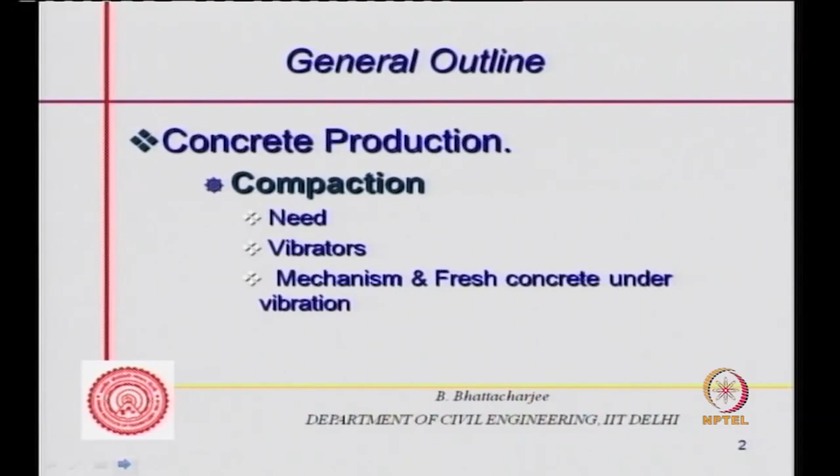So first we talk about compaction. Why do you need it at all? Then generally we use vibrators, so something about the vibrators themselves. Then the mechanism of fresh concrete under vibration, briefly, since we have discussed quite a bit of it elsewhere earlier. Then we'll talk about execution of vibration again briefly, and lastly we'll talk about curing, need and method.

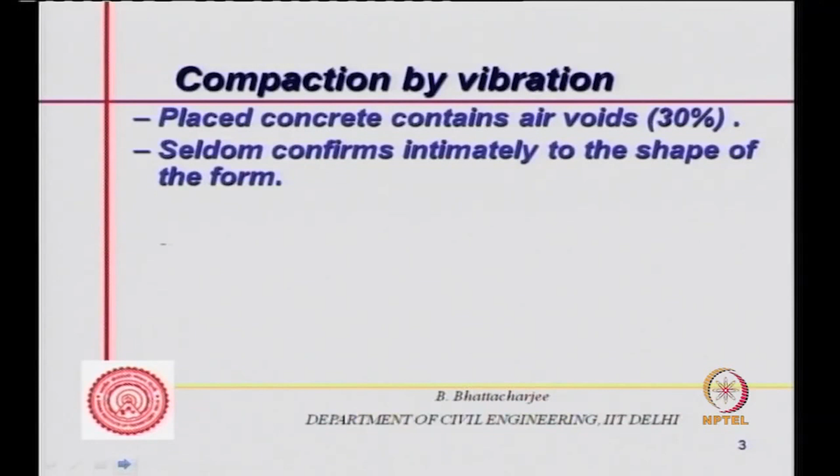Let's talk about compaction, which you usually achieve by vibration. I mentioned earlier that placed concrete contains air voids up to 30%, if it is dry concrete - we're not talking about very highly flowing or self-compacting concrete. Also, concrete seldom conforms to the shape of the form. Therefore compaction is required to drive the entrapped air out, to densify the concrete, and also to increase homogeneity and uniformity. This has other benefits, but largely the entrapped air has to be driven out and concrete must be densified. That's why we need vibration.

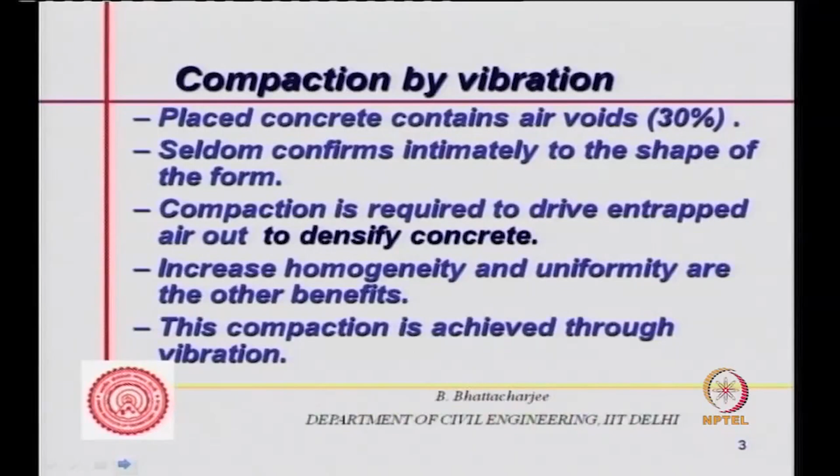This compaction is achieved of course by vibration, as we mentioned earlier too.

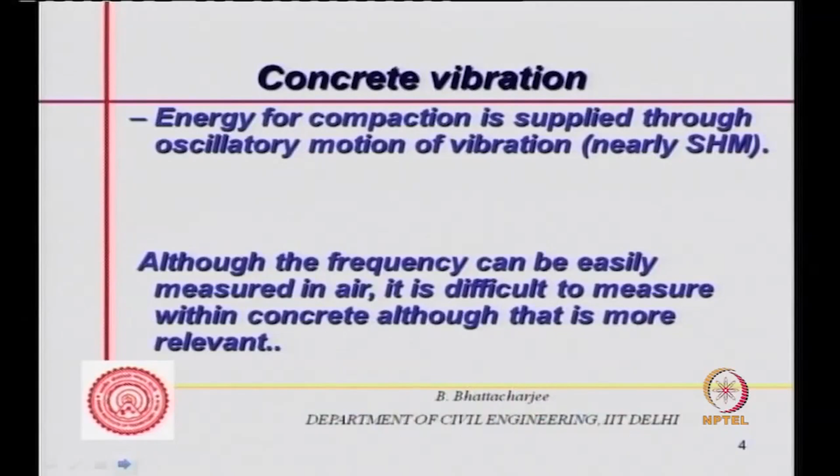Now, concerning concrete vibration - energy for compaction is supplied through oscillatory motion of vibration, which is nearly simple harmonic motion. We can measure the frequency of such vibration in air, but it's difficult to measure within concrete, though it's more relevant if we can measure the amplitude of this vibration. This energy is generated by means of a rotating eccentric having a frequency and amplitude of vibration. So essentially every type of vibrator is basically a moving eccentric with frequency and amplitude that generates the vibration, and this oscillatory motion, which is simple harmonic motion, causes air to drive out. We'll look into the mechanism of course.

We can determine the frequency of the vibrating machine or equipment in air, but within concrete it is difficult because of the effect of damping and other factors - the interaction of the vibrating component with the concrete makes it difficult to measure the frequency there.

Now we have generally two types of vibrator classification: internal vibrator and external vibrator. Internal vibrators are themselves classified into three types. We will not discuss all of them since it's not about machines, but the most commonly used internal vibrator is the flexible shaft type. The other is a vibrating machine where the motor is handheld, and power is transmitted straight away to the vibrating component. Then there are air vibrators, which can also be internal vibrators. But the most common type is the flexible shaft type. Once in a while, you might see an electric motor in hand, where the rotating part or eccentric, which actually provides vibration, is just connected to the motor.

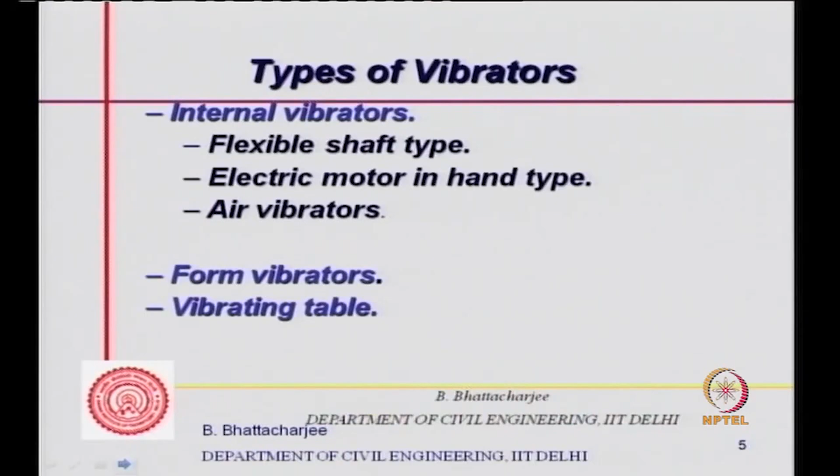The external vibrator is the form vibrator, which vibrates the form, and there's also the vibrating table, generally used in laboratories or for precast elements - you put your mold and concrete on a table which can vibrate. Form vibrators are relatively more common, but the most common overall is the internal vibrator of the flexible shaft type. Let us see what they are.

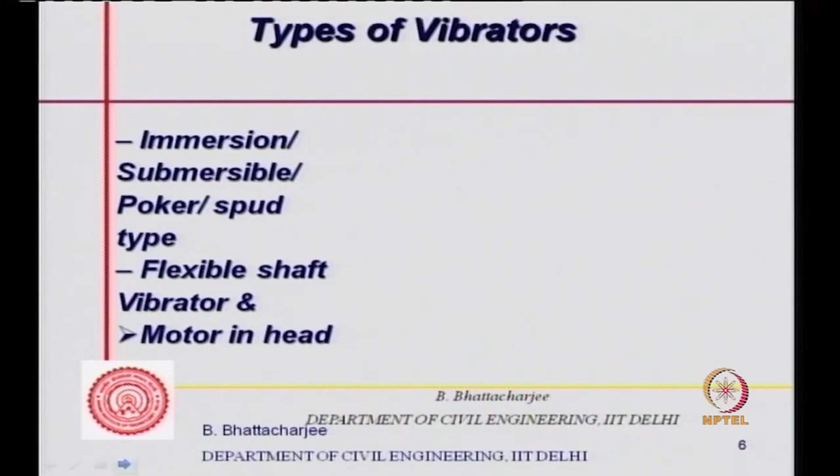There are surface vibrators used for floors - vibrating screeds etc., for floors or flat surfaces like slabs. Immersion, or the most common type, is the immersion vibrator, also called a submersible poker or spud type. They have a flexible shaft, and there's also the motor-in-head type.

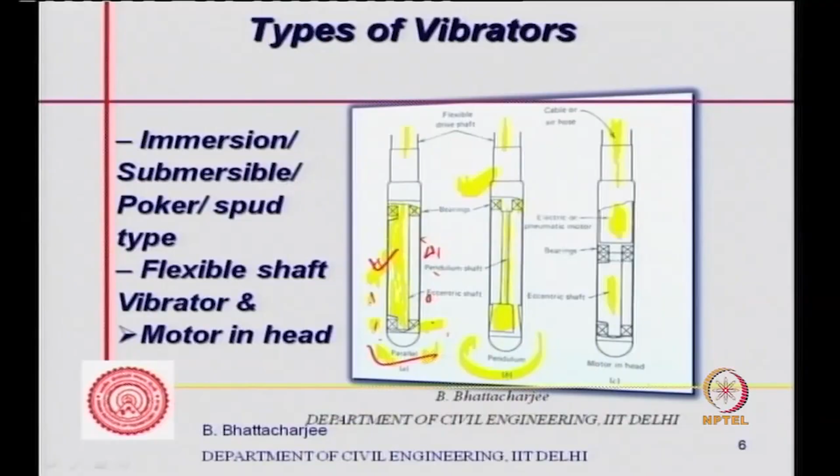So this portion of the equipment goes inside the concrete and causes oscillatory motion in the concrete, which will be compressed and rarefied, radially going outward, generating longitudinal waves, as well as possibly other kinds of waves, but largely generating longitudinal waves and maybe some transverse waves too.

It causes oscillatory motion that spreads around over a circular area having a radius of influence. So what you do is shift from one place to the other, and it goes on vibrating the concrete.

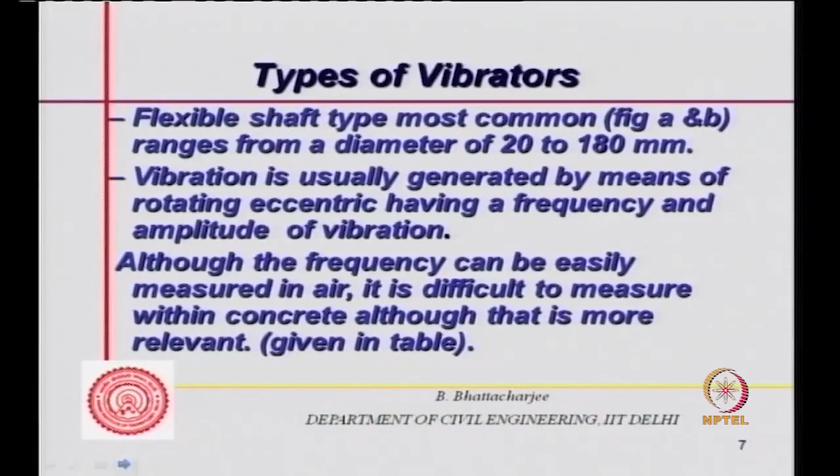This flexible shaft type is the most common, and its diameter can range from 20 millimeter to about 180 millimeter. Usually vibration is generated by means of a rotating eccentric, having a frequency and amplitude of vibration, and data on frequencies etc. is available.

So dimensions range from 20 to 80, up to 180. Now look at this head diameter of the needle, 20 to 40 mm. Where will you be using this? In plastic concrete, thin section. This will be used in plastic concrete - P stands for plastic, T stands for thin section, and congested reinforcement.

So here I have C stands for, P stands for plastic, T stands for thin section, and C stands for congested reinforcement.

So you see, this head diameter 20 to 40 mm. 20 mm is used in thin sections, for example the web of a box section - a thin web, about 100 or 150 mm thick, with a lot of reinforcement plus a pre-stressing cable passing through. So it's a thin section, and the concrete has to be plastic, because if it's dry concrete, you will not be using this.

Now recommended frequency in kilocycles per minute is given as 10 to 15,000. And you can see as this diameter increases, frequency reduces. So this is high frequency, this is lower frequency.

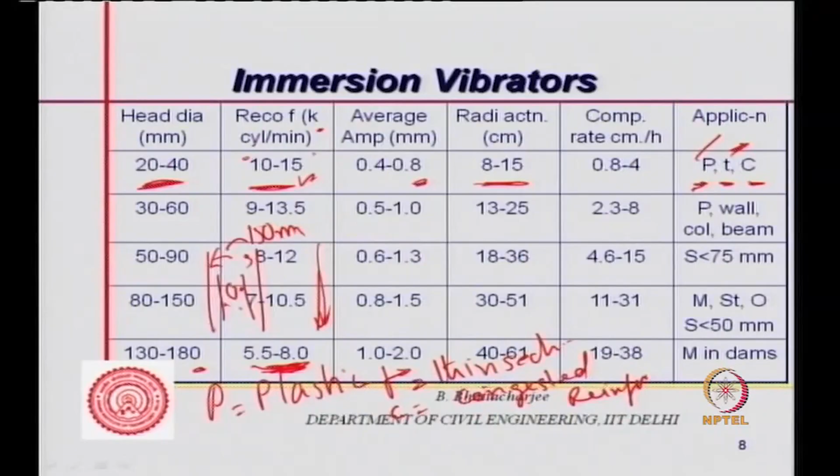So where you have a thin section, plastic concrete, congested reinforcement, you might use this. While this might be used in mass concrete, where radius of operation is quite high and compaction rate is also fairly high. So where you have large mass concrete that you want to vibrate, you might use the massive section type, for example in a dam. M stands for massive concrete, so mass concrete in dams you will be using.

In between, around 30 to 60, very common is about 60 mm. This is very common, suitable for slump less than 75 mm, relatively stiff concrete, not very stiff. This is absolutely plastic, maybe 100 mm slump or less, just below pumpable concrete. Pumpable concrete is quite flowing, but if you are compacting pumpable concrete, then this should be used. But in thin sections or larger sections, of course, you can use this one.

For plastic concrete - wall, column, beam - you can use 30 to 60 range, and as you see it reduces here to 10 to 15, 9 to 13.5, and so on. Average amplitude increases along this direction, while this becomes lower and these increase along this direction. Radius of action increases along this direction, and compaction rate also increases along this direction. So for 80 to 150, you will be using mass concrete.

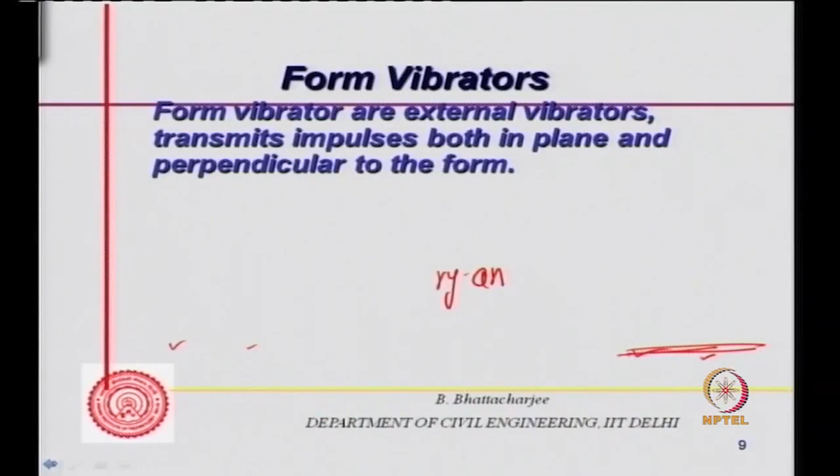You can see the RPM - these kilocycles per minute are 6 to 12 kilocycles, and here 3 to 6 kilocycles per minute. If you look at the earlier cases, this is relatively on the higher side - for larger needles, you use lower frequencies. If you go back to the previous one, the 10 to 15 case, the first smaller one was using thinner ones with higher frequencies. So this is somewhere in between.

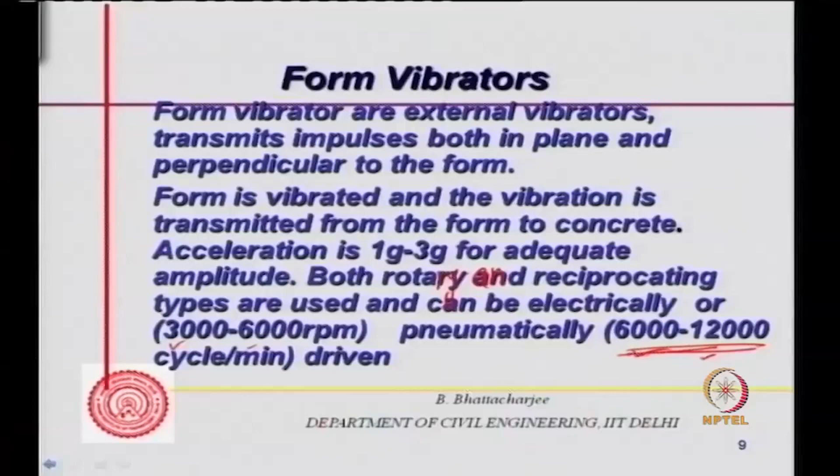So these are form vibrators. Quite often we use them in thin sections where we can't use a poker or needle vibrator, or when using them together with needle vibrators. Form vibrators are used in thin sections, but it's not the best option - some of the energy will be lost in vibrating the form itself. Needle vibrators do a much better job because they're internal vibrators that go inside and compact the concrete directly. Also, vibration from form vibrators will be limited up to a certain depth from the form only.

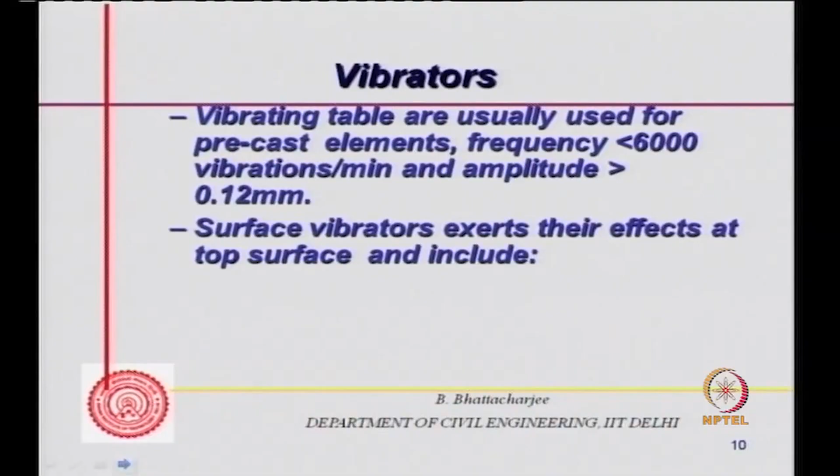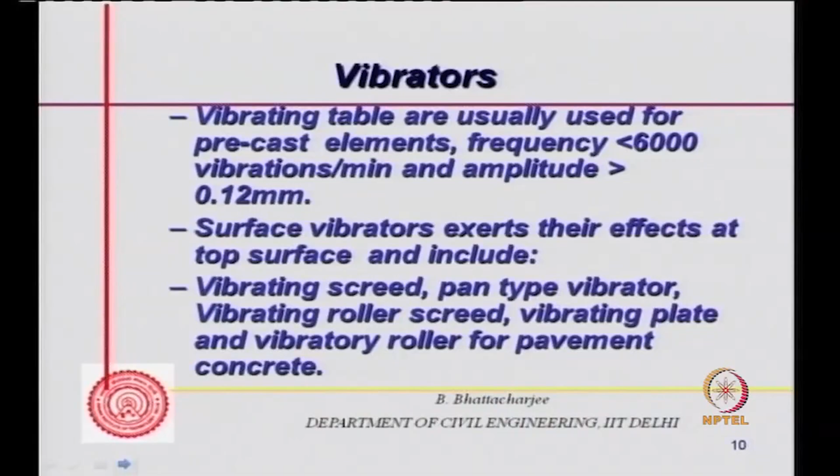The other kind of vibrator is the table vibrator or vibrating table, usually used for precast elements or in laboratories. Frequency is less than 6000 RPM (vibrations per minute), and amplitude is greater than 0.12 millimeter. For precast elements, one can use this. Surface vibrators exert their effect at the top surface and include the vibrating screed, pan type vibrator, vibrating roller screed, vibrating plate, and vibrating roller for pavement concrete - each having specific uses.

So we have seen where we select the needle vibrator and of what dimension. Now we can look into form vibrators - where do we select them? Where it's impractical to use internal vibrators, or where they might supplement the internal vibrators.

Vibrating screeds are used in thin slabs. High frequency and low amplitude vibration generally results in more efficient compaction. The thinnest needle vibrator is actually most effective, but its radius of action is also low, so your effort in moving it will be relatively high.

How does fresh concrete behave under vibration? Let us see.

As we said, prior to compaction, concrete is a mass of separate particles coated with mortar, held in a pile by an arching action of the coarser particles. If you can recall, it will be something like particles of different sizes and shapes heaped up together, with mortar in between - like a pile of material with mortar in between. So the red represents the mortar, black represents the aggregates. I've drawn them as spherical aggregates, though they need not be so.

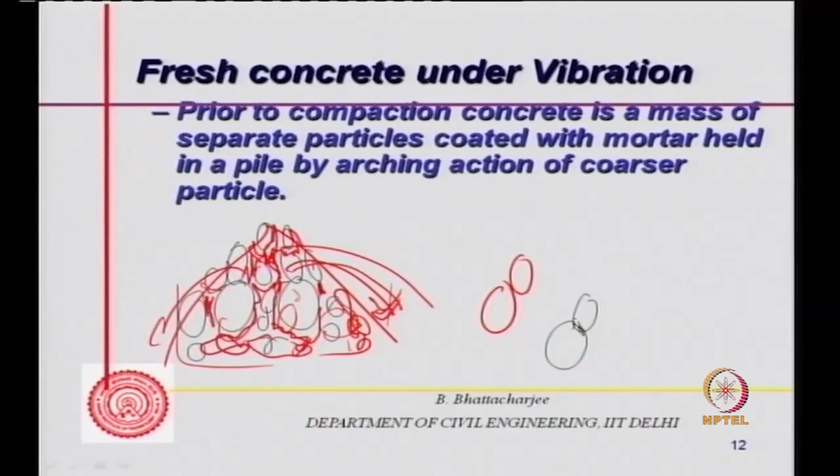So arching action holds the particle because one particle is touching the other, by friction. So by the friction they are just in position. Their fall due to gravity is restricted or obstructed by the friction between the particles. So you have to overcome this friction. And how do you overcome this friction?

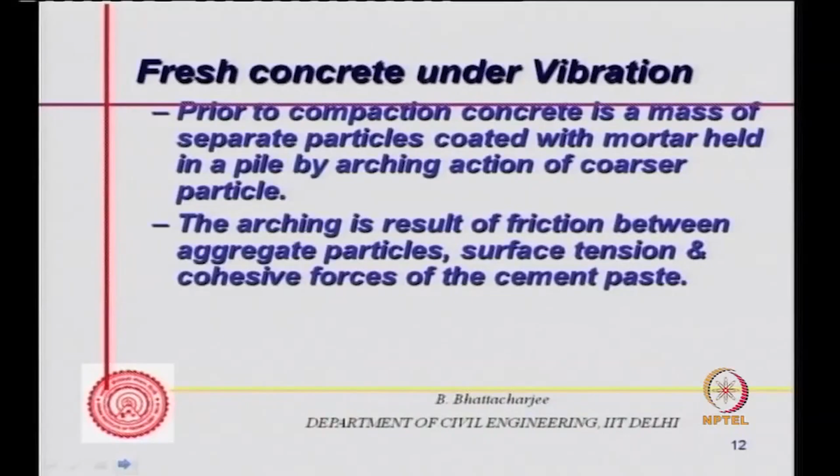So one has to overcome this friction. The arching is a result of friction between aggregate particles, surface tension or cohesive forces of cement paste. Since the paste is in a liquid or plastic state, there's some surface tension and cohesive forces of the cement paste that also hold the particulate system in position in the heap. Now you got to overcome this.

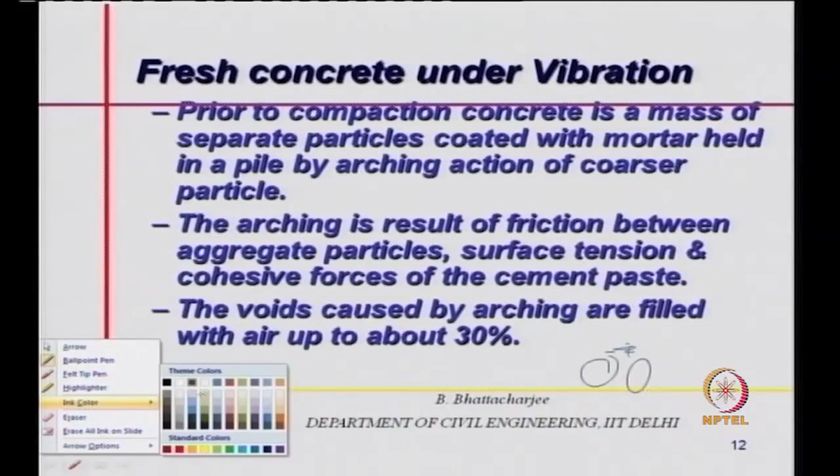So this arching actually results in a void of air of about 30%, because the particles are something like this, and there is mortar, as I said. But there will be an air gap in between. So there will be some amount of air gap in between. This air gap is about 30%.

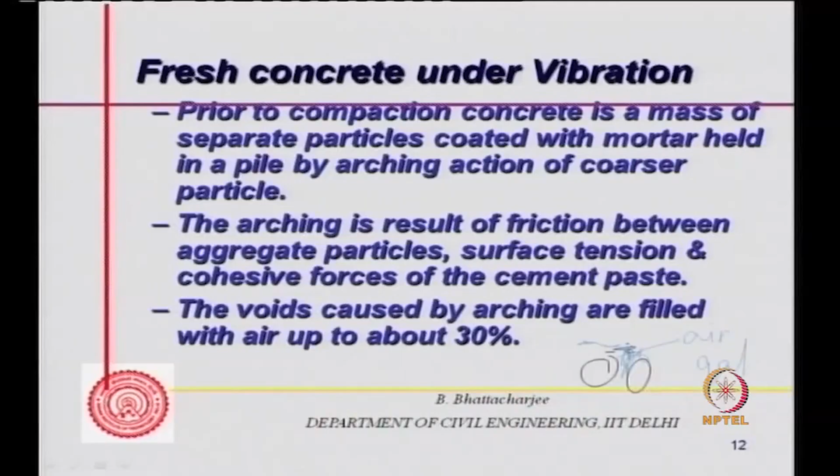So you will have an air gap somewhere in between this particulate system, and these air gaps would be about 30%. 30% air gap would exist, and you've got to drive this air out. So that is the idea, the idea of vibration.

So what happens is the vibratory impulse actually liquefies the mortar portion of concrete, and thus reduces the internal friction, resulting in consolidation by force of gravity. Then once the concrete is vibrated completely, the friction is re-established, cohesion is restored, and strength increases.

Now how does it occur? The vibratory impulse essentially causes the water in the cementitious paste system to vibrate more, moving more than the solid particles. The more constricted the necks are, the more pressure it exerts, and this pressure overcomes the friction, resulting in a kind of collapse of the system.

So the velocity of compression waves generated could be of the order of around 45 meters per second at the beginning of vibration, increasing to 240 meters per second at the end. So essentially liquefaction of the mortar occurs.

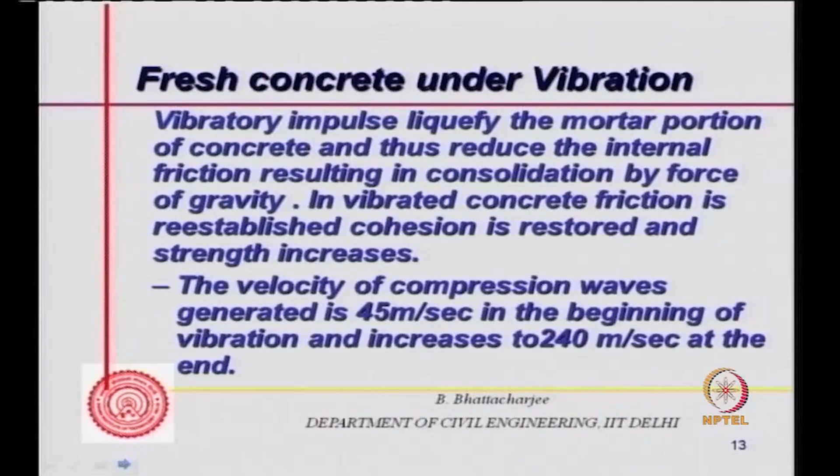That's because the water within the pore system vibrates or moves more than the solid particles, causing an excess pressure in the system, which reduces or overcomes the friction within the particulate system.

And results in mobility or movement of the particles, and also drives out the air. For 200 hertz, the velocity corresponds to a wavelength of the order of around 0.2 meter to about 1.2 meters. That's of course the thing.

The waves move water more than the solids, as I was saying, and generate hydraulic pressure within the interstitial water-filled spaces. This pressure is maximum in the most constricted space and causes reduced internal friction, giving the paste temporary fluidity.

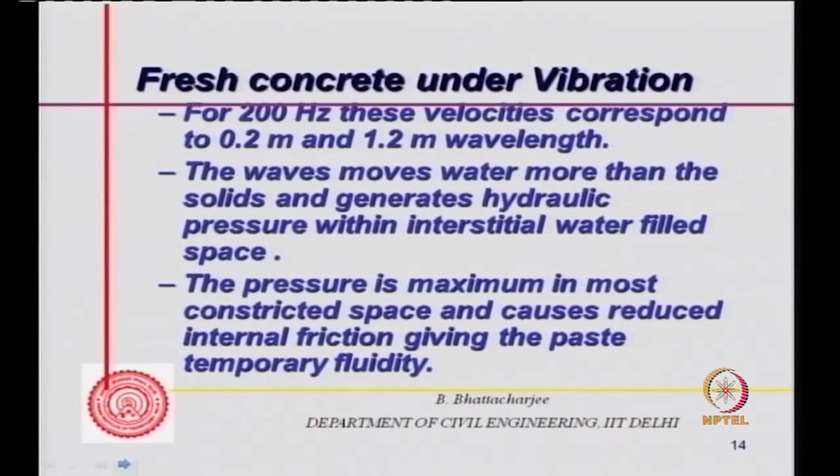So this water within the constricted space, because of the movement, exerts pressure, and that overcomes the friction. And that's how the particle moves, right? That's how the particle moves.

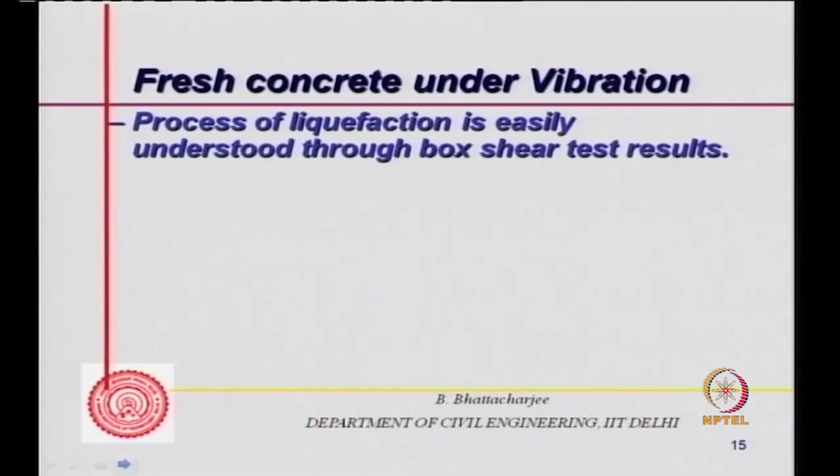The process of liquefaction is easily understood through, let's say, the box shear test, which we normally do in soil. Now this kind of test was also conducted in concrete long back, and one would see something of this kind.

For example, you have shear strain along this direction and shear stress along this direction. Now you apply normal pressure, sigma n, and tau is applied from this side, and strain is measured as delta divided by h. This is h and delta is this distance. So if you measure stress versus strain, you find this sort of curve, and this depends upon sigma 1, sigma 2.

As you increase the normal force, the yield shear stress actually increases. Higher normal force, yield shear stress increases. Concrete researchers have done box shear tests, and this is the kind of behavior one would normally see.

Like soil, you can plot shear stress versus normal stress curve, and it can be related linearly. So tau, the yield shear stress, is a function of tau 0 at the intercept, plus mu into sigma. So the yield shear stress is a function of yield.

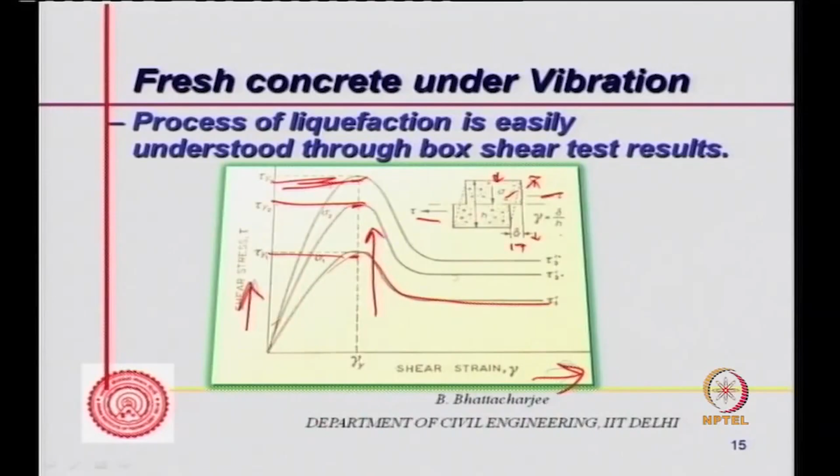What is yield shear stress? That was shown in the previous diagram. Yield shear stress increases with sigma, and one can linearly relate this: tau 0 at zero normal stress, and this is the tensile strength of the whole thing, normal tensile strength. So mu is this slope, and sigma is the normal stress.

Mu is equal to tan phi, where phi is the angle of repose. So mu equals tan phi, the angle of repose. This we know in soil. Drier concrete almost behaves like soil, and people have studied this.

The shear stress-strain relationship before vibration, if one measures, but if I measure during vibration, for the same sigma 1, sigma 2, sigma 3, the stress-strain curve is something like this, but when I vibrate, the stress-strain curve goes like this. During vibration, the yield stress reduces significantly, and the stress-strain curve becomes something like this.

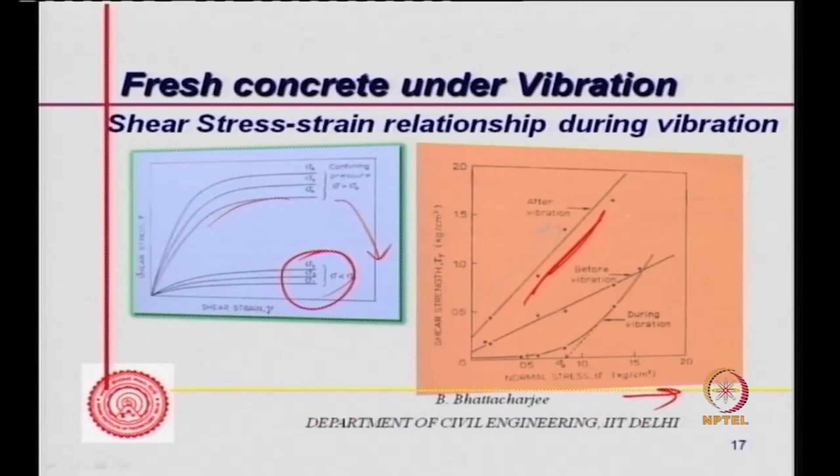So looking at it again, this was the case prior to vibration, this is mu, and tau y equals tau 0 plus mu sigma, before vibration.

During vibration, the yield shear stress reduces significantly, and after a certain period of time, tau reduces significantly, depending on the sigma value. After an increase in the sigma value, it behaves almost, not exactly parallel, but in some similar fashion.

So when sigma normal applied is small, yield shear stress is small for small sigma n. During vibration, it behaves like this, and up to a certain sigma normal value, practically there will be no yield shear stress.

This sigma value corresponds to the equivalent force of vibration. We define this as agitation pressure. So the agitation pressure is where, if the normal stress is less than the agitation pressure, which is the slope, if I extend this line during vibration, the normal stress that corresponds to this is the agitation pressure.

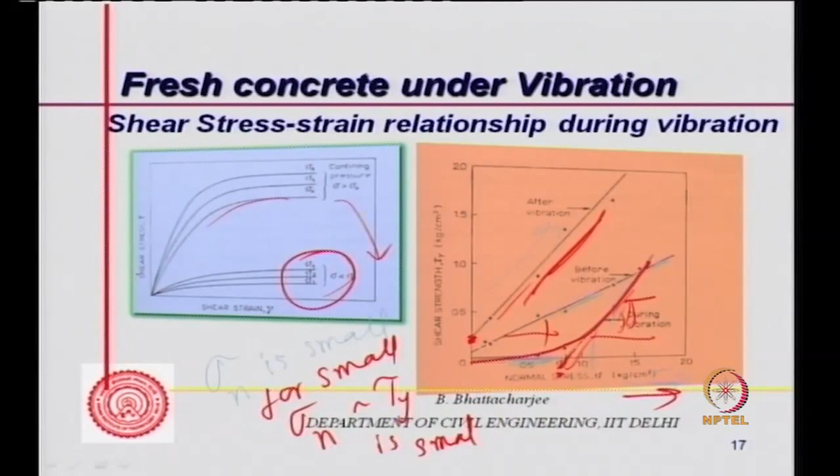After vibration, it stiffens, and the yield shear stress goes back to a higher value. Once you stop the vibration, the cohesiveness is re-established, and that's how the behavior is. So it would again show up the strength part of it.

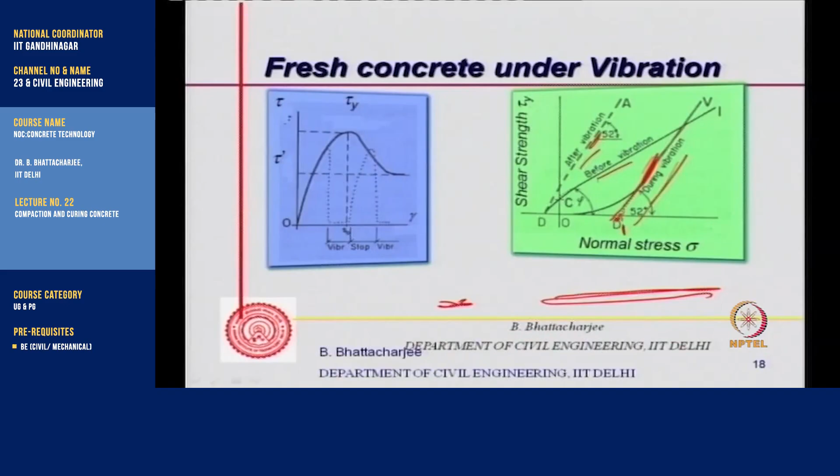The same behavior is shown here: during vibration, before vibration, and after vibration. This angle also increases. This angle is more or less similar, while this angle is less. So tan phi, mu sigma, has increased, meaning the angle of repose has increased, which means it can stand on its own more stiffly at a steeper angle. This diagram also shows this before vibration.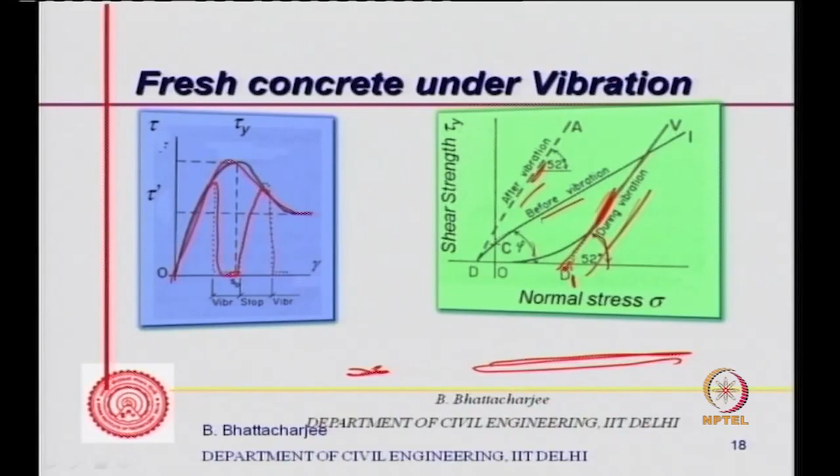During vibration, you start vibrating and yield shear stress comes down very significantly, and then you stop, and it re-establishes itself. So basically, when vibrating, yield shear stress comes down. Therefore, particles can move; movement due to shear force can occur. They can move over each other or slide over each other.

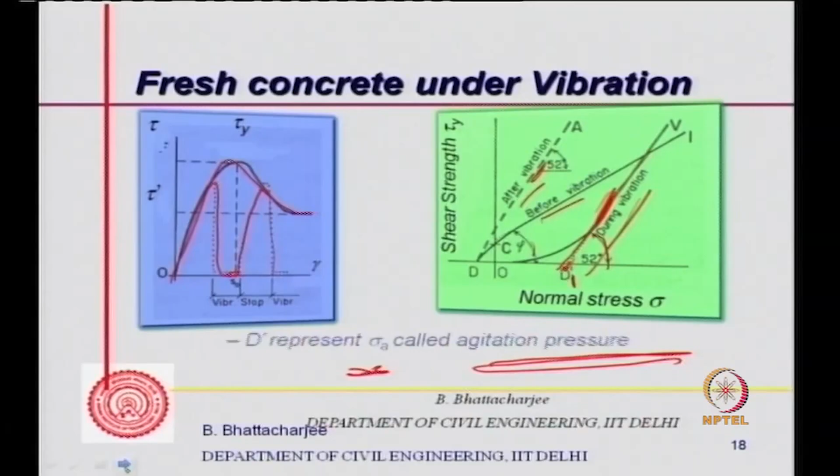Shear flow would be occurring, and due to this the air will be driven out, and it can get the right kind of shape of the mold itself. So that's the mechanism of vibration. Fresh concrete consolidation actually occurs in two phases.

In the first stage, vertical settlement of coarse aggregate takes place in a manner similar to packing of granular material, and shape of the aggregate plays a major role. Air voids up to 5% remain after this. Spherical particles will easily roll over, so vertical settlement in the first stage becomes easier for rounded aggregate.

At the end of the first stage, concrete behaves like a dense liquid because the air voids have been removed quite a bit, and finally air voids are removed from the surface, forcing mortar to appear at the surface. So this is important to understand: once the air voids move out, the mortar will appear at the surface.

So once the first phase is over, in the second phase the mortar actually comes out, and that's also a test for whether the vibration is complete or not. You'll find a slurry or mortar phase coming out at the top, and then you can stop vibration.

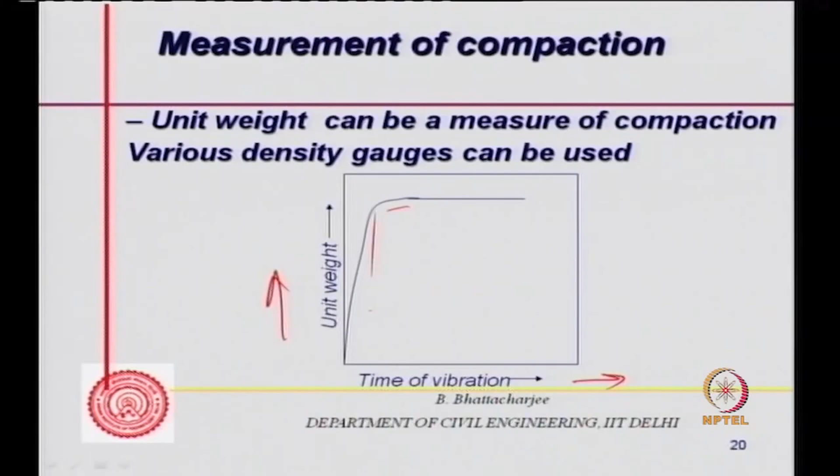One can measure the unit weight using various density gauges, and they typically look like this: unit weight versus time of vibration. After a certain period of time, vibration is complete. In fact, somewhere here the mortar would have come out right at the top, and after that you need not look into anything further; the vibration is over.

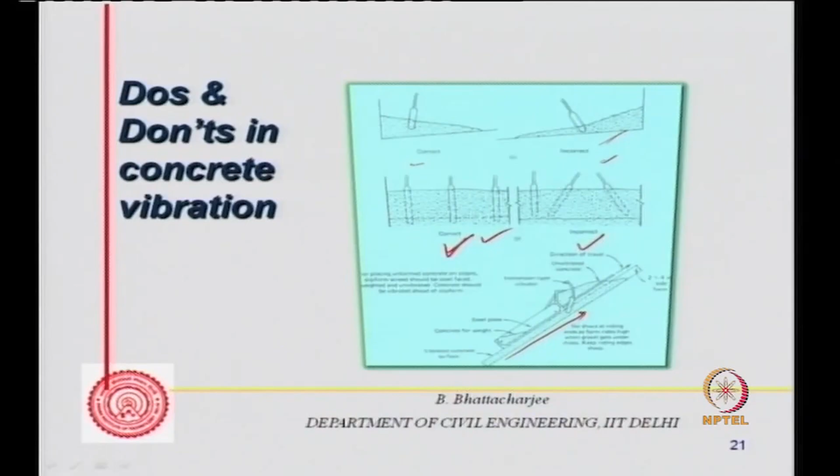So those are some do's and don'ts with respect to vibration. It should not be moved using the internal vibrator, as this can result in segregation.

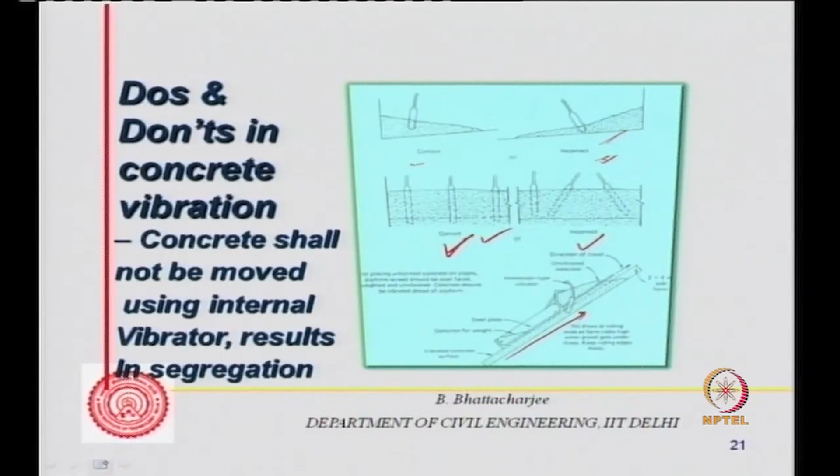The idea is to penetrate vertically, sufficiently embed it in the concrete, hold it stationary, and remove it slowly, say at 7.5 centimeters per second, which is a good slow velocity, though one may not actually be measuring this. But the key is that when taking out the vibrator, it should be taken out slowly.

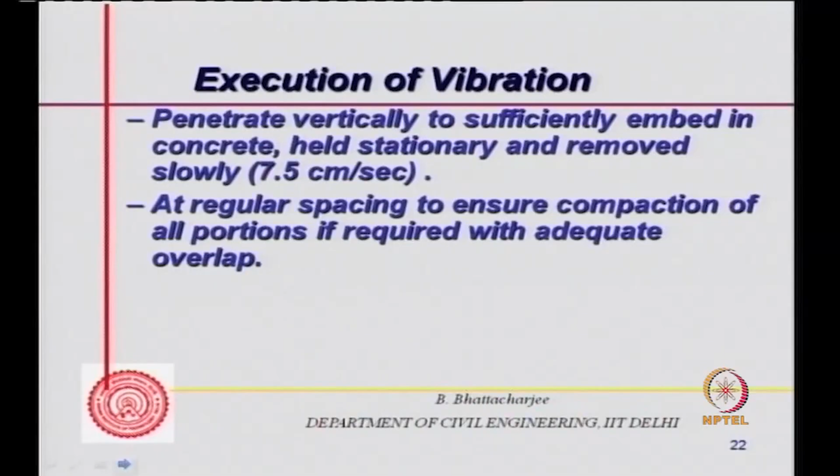It should be done at regular spacing to ensure compaction of all portions with adequate overlap. Typically it should be like this: if this is the radius of action for the type of needle discussed, the second needle location should be placed so there is the right kind of overlap between the zones of influence.

In other words, if I have sections like this where one circle covers a certain area, or in a thinner section covers something like this, the next one should overlap it, and so on. There should be sufficient overlap between each location so that no portion is left uncompacted or blank.

Minimum usually 10 seconds is necessary for complete compaction. There's an equation for the vibration time needed, but that's not important since nobody really uses it. The key is that you keep it in for at least 10 seconds, and when you see the mortar has come out, you pick up the needle vibrator and lift it slowly at a very low velocity, so you can see the slurry right at the top.

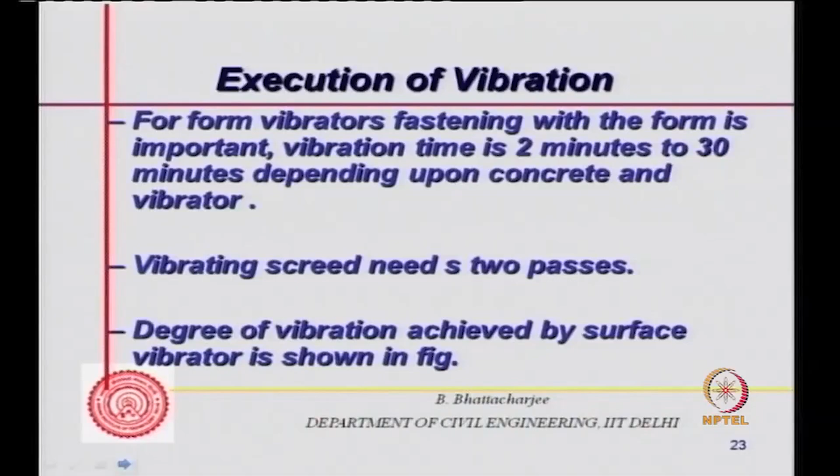Degree of vibration achieved by surface vibrator can be seen from the figure. Actually, it only reaches a certain depth, about 8-10 centimeters from the top, which means 80 mm, and not really much. After that, the density reduces down. So only the top portion can be vibrated. Similarly, shutter vibrator also will not penetrate throughout the section if the section is thick.

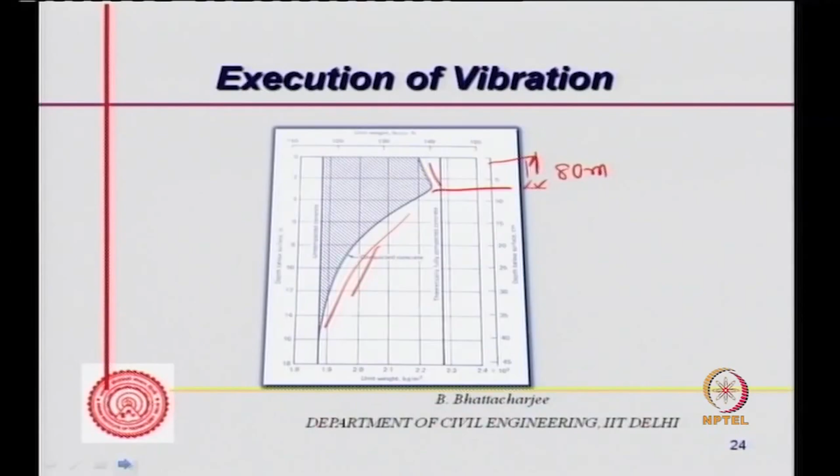Now, imperfections in vibration - honeycombing. This is an imperfection due to poor vibration essentially, in concrete vibration. Honeycombing happens if you have not done the vibration properly, and it will have stony and air voids. It can generally happen in narrow sections, and grout loss can also cause this if the forms are not joined properly.

Free fall, low slump concrete, and poor vibration can result in honeycombing. Blow holes or bug holes, which you see normally in concrete, small holes, aesthetically ugly looking. Excess form oil, if you are using, can cause this. Lean and low slump concrete, and inadequate vibration can cause it. So poor vibration results in honeycombing, and inadequate vibration increases bug hole formation. Bug holes are pretty common, not very harmful, but they look ugly, not a good finish.

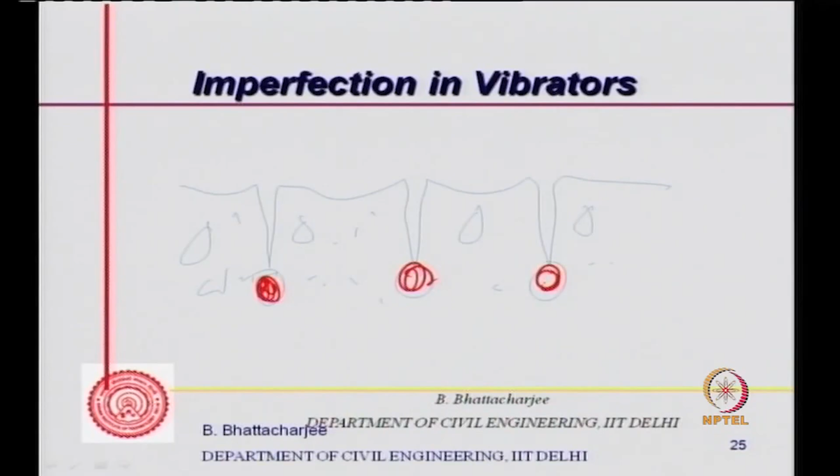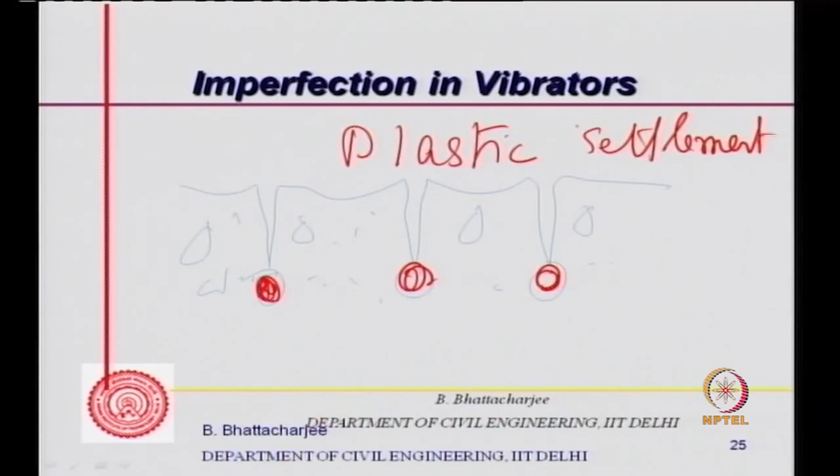This is my concrete, a large slab, and a similar situation - you might see plastic settlement cracks just over the rebar, just over the reinforcement bar. So this is plastic settlement crack. It comes when your water content is too high - plastic settlement crack for high water content and inadequate vibration. Where you have high water content, if you have done inadequate vibration, you might still get this. In fact, inadequate vibration is also a cause, not the primary cause, but it's also a cause.

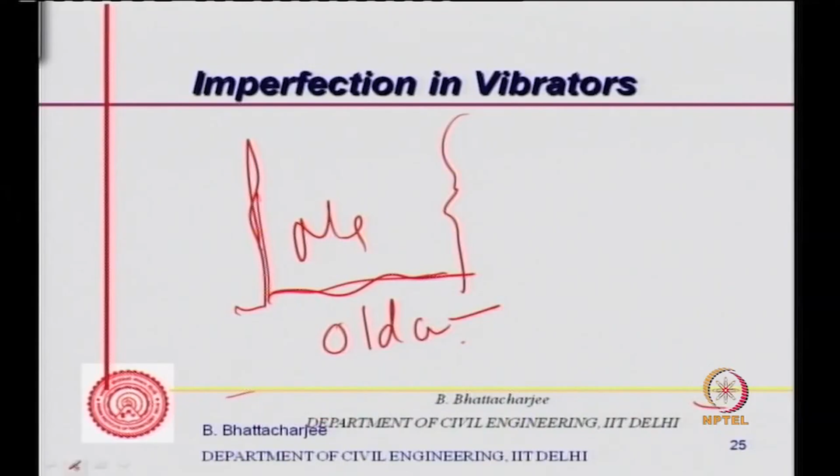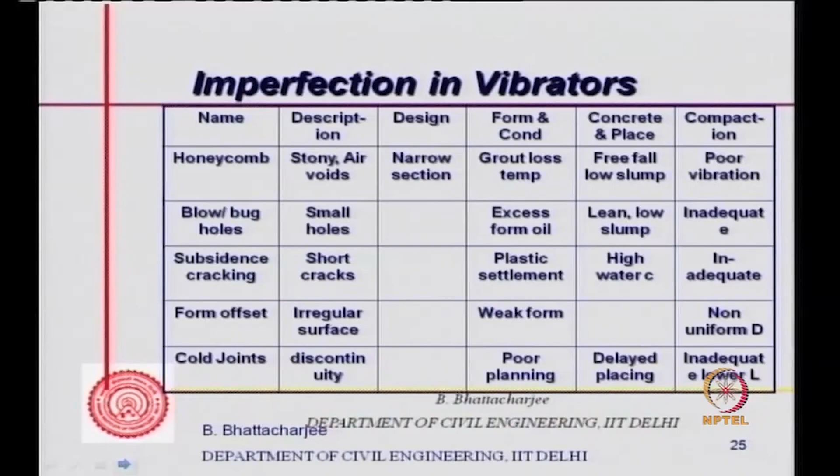Form offset, of course, has nothing to do with vibration - if your forms have not been bolted properly, this can result in defects. Cold joint formation is also due to inadequate vibration of the lower level. Cold joint occurs when you have old concrete, and then new concrete placed over here. So there can be cold joint formation if it is inadequately vibrated - you might get cracks coming in, or a weak joint forming if it is not vibrated properly. These are the defects that can come from imperfections in vibration.

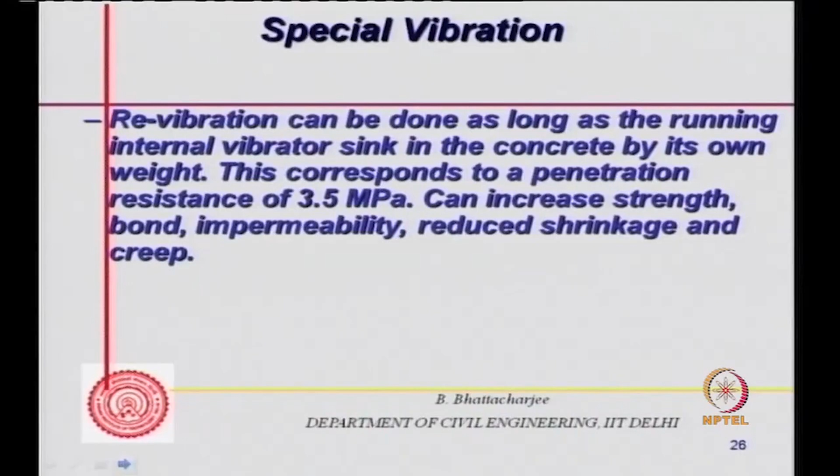Special vibrations are vacuum vibration. Revibration can be done as long as the running internal vibrator sinks into the concrete, with penetration resistance of around 3.5 MPa - penetration resistance being a measure of setting. If it is more than that, you cannot use it. Revibration can increase strength, bond, impermeability, and reduce shrinkage and creep. So revibration is not desirable, but you can do it as long as the concrete is not set, measured by penetration resistance.

Vacuum vibration is accomplished by applying vacuum to the surface of fresh concrete. Cement paste is densified by removal of air from the surface and water from a certain depth. This is applied for vacuum dewatered concrete flooring needing high abrasion resistance, like warehouse or industrial flooring, where you are likely to have a lot of abrasion. Basically water used for placing the concrete is removed, so the water cement ratio is low and you get relatively strong concrete.

Placing concrete with higher water content, then extracting the extra water by vacuum dewatering improves strength. Commonly used for slabs and walls, vacuum between 30 to 50 centimeters of mercury is applied by means of special liners of material which allow water to come out while keeping the solids. A mat is placed on top of the concrete and water is evacuated out through the vacuum.

It should be applied as early as possible. Penetration of vacuum is up to about 30 centimeters, and it is less efficient in air-entrained concrete because the air will come out.

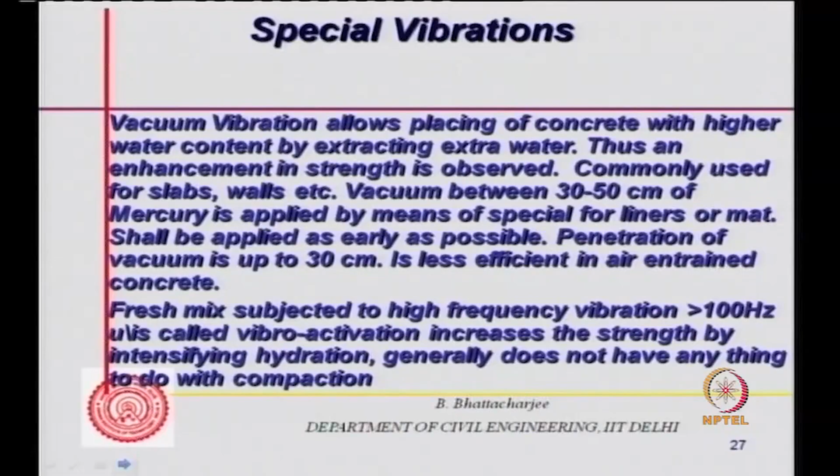Fresh mix subjected to high frequency vibration, over 100 Hz, is called vibro activation. It increases the strength by intensifying hydration, but generally does not have anything to do with compaction. So if you use high frequency vibration, the hydration process increases, but it has nothing to do with compaction. Right, so these are special cases.

Now let's look into the second part of our discussion, that is curing.

Hydration reaction is not instantaneous, it's not like an explosion reaction. It occurs over a long period of time, and therefore water must be available for hydration. For hydration to continue, you need a relative humidity of 100%.

Besides, there will be loss of water by evaporation, and it shall be prevented. If you can't prevent it, it should be replenished. Then some water will be consumed by the chemical reaction itself, which is called self-desiccation, and this also has to be replenished. So essentially, the reaction requires a longer period of time and occurs only at 100% RH, so you must maintain 100% RH. Loss of water by evaporation occurs and has to be replenished to maintain 100% RH. Self-desiccation also causes some water loss, and that should also be replenished.

And also sometimes you need to maintain conducive temperature. So this is the purpose of curing, the need for curing.

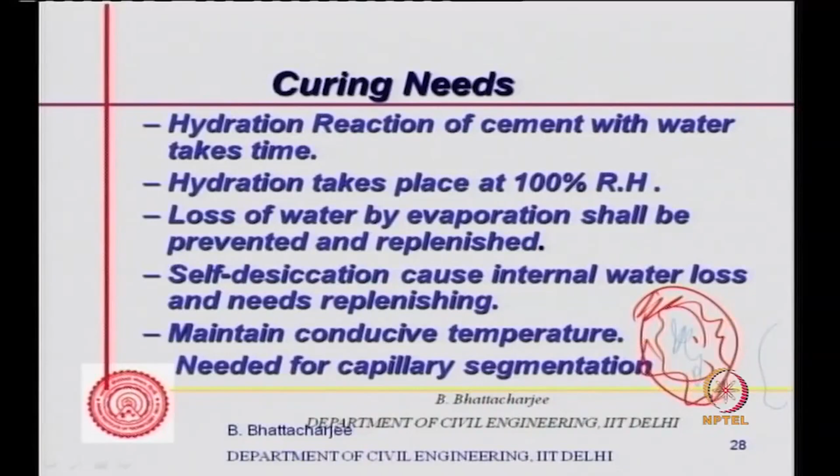Most important is, if inadequate hydration occurs, the capillary pores in the system—which we discussed earlier, between cement hydrates, outer product, etc.—you will have an unhydrated cement system. Unhydrated cement is somewhere there, and there will be interconnected capillary pores in between. These capillary pores need to be segmented.

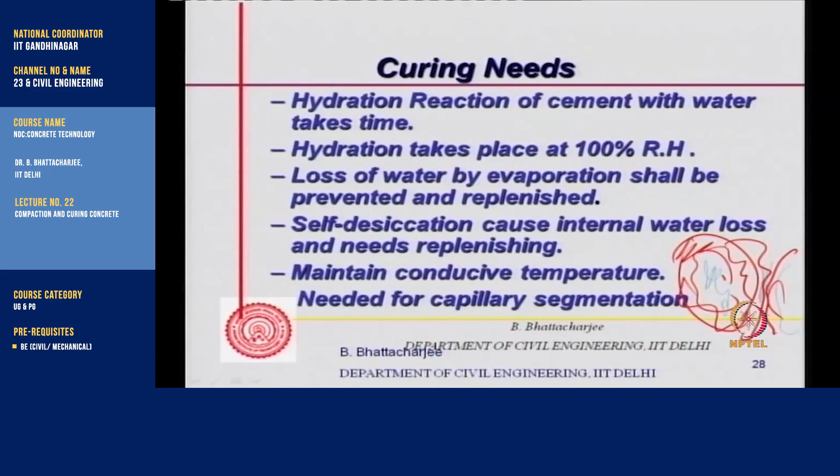Only when you have sufficient hydration product will they come and touch each other from both sides, and the capillary will get segmented. So minimum curing is required to ensure that the capillary gets segmented. Otherwise, unsegmented capillary will result in poor durability of concrete.

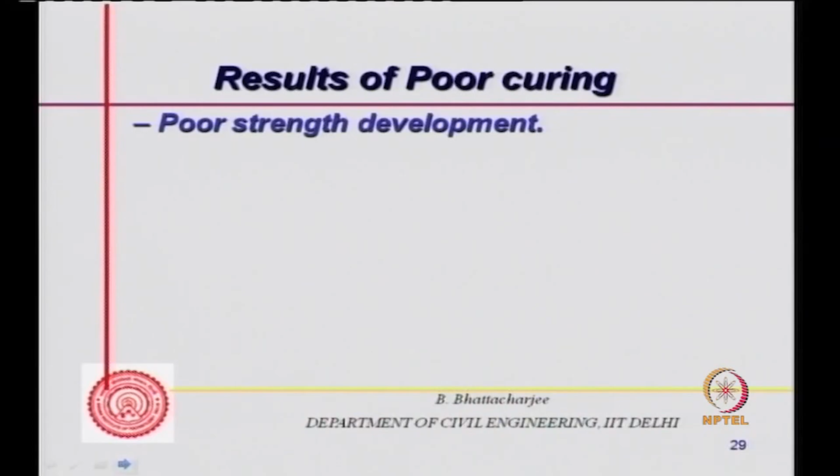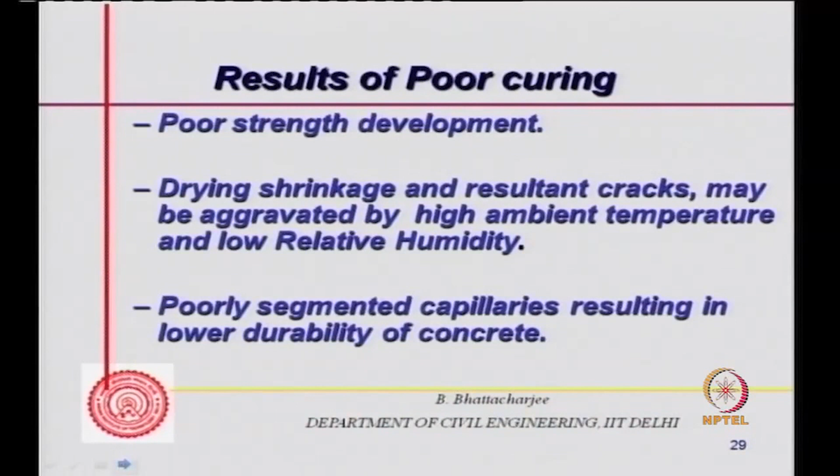So if you have not done good curing, what will happen? Obviously strength development would not be there because hydration has not occurred. A lot of pore space will remain, and drying shrinkage can result because the water has gone out, which can cause cracks. This may be aggravated by high ambient temperature and low relative humidity. Poorly segmented capillary results in lower durability of concrete. So this is the effect of curing.

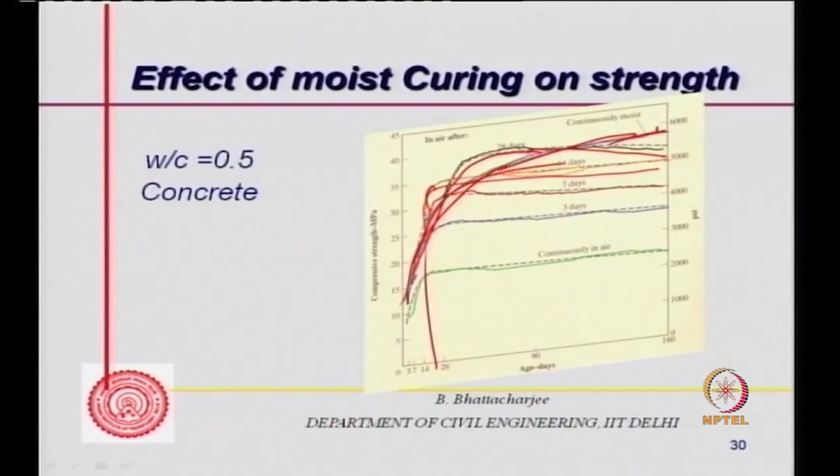Now, how do we do curing? We do moist curing. Suppose I have a water cement ratio of 0.5 concrete, and if I cure it continuously submerged, the strength will increase in this manner. Given 28 days of curing, strength will increase this way. With 14 days cured, strength will go like this up to 14 days and then flatten out. For 28 days, strength will increase nearly up to 28 days, then it will flatten out.

Continuously moist cured, it will go like this. Continuously in air, strength development will be much less with time—up to 3 days there will be a slight increase, but little more beyond that. So what happens is, when you stop curing, hydration proceeds for a little while, and after that there is no further strength development.

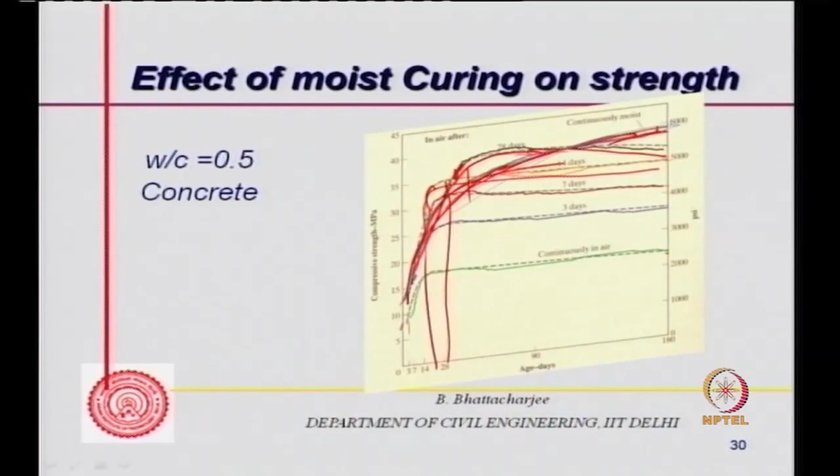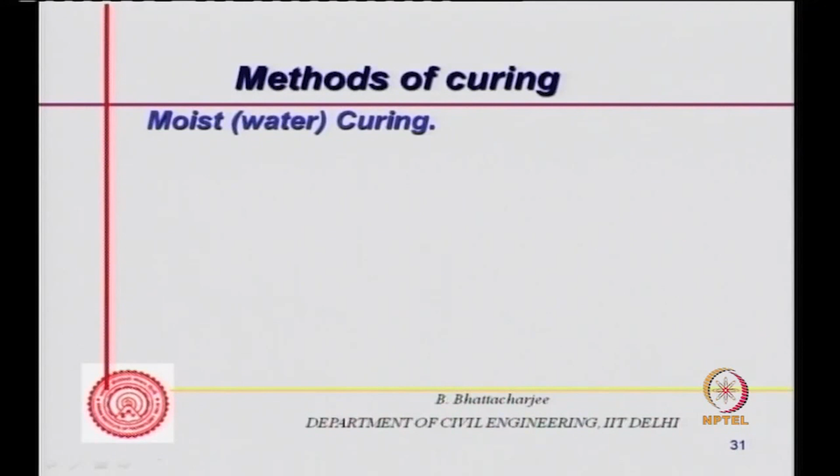So strength development is needed. Compressive strength is a function of curing age. If I continuously moist cure it, this is what I get—it increases significantly and continues increasing. For strength gain, I need some minimum amount of curing. The more moist curing I do, the more strength concrete will gain this way. Methods of curing—obviously water curing is number one.

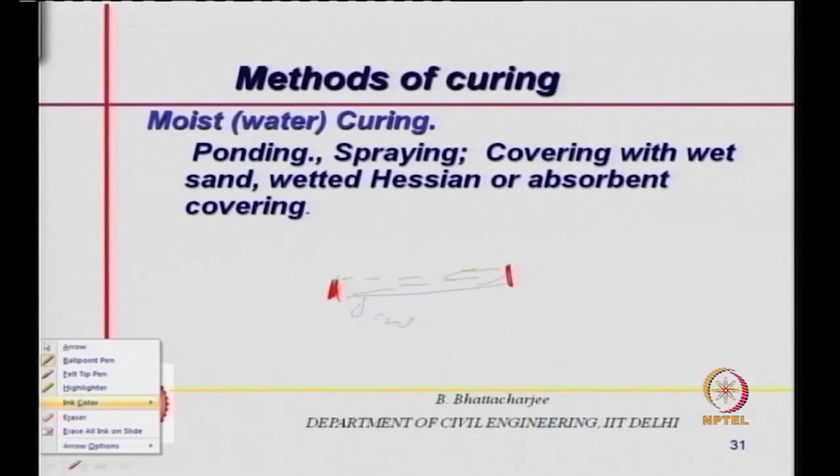Ponding, spraying, that's how you do it. If it is a slab like this, concrete is here, so you make some sort of a barrier on both these sides, and simply do ponding, with water here. So these slabs you can actually do ponding on a slab.

Spraying, with any kind of pipe, and then covering with wet sand. So instead of ponding, you can just put sand particles here, and this has to be maintained wet. Or you put wet Hessian cloths or absorbent covering. This could be for slab or for columns also. For example, if it is a column, you can put wet Hessian cloths here, which will remain wet all the time, with some kind of absorbent covering. So this is one, moist curing is done in this manner.

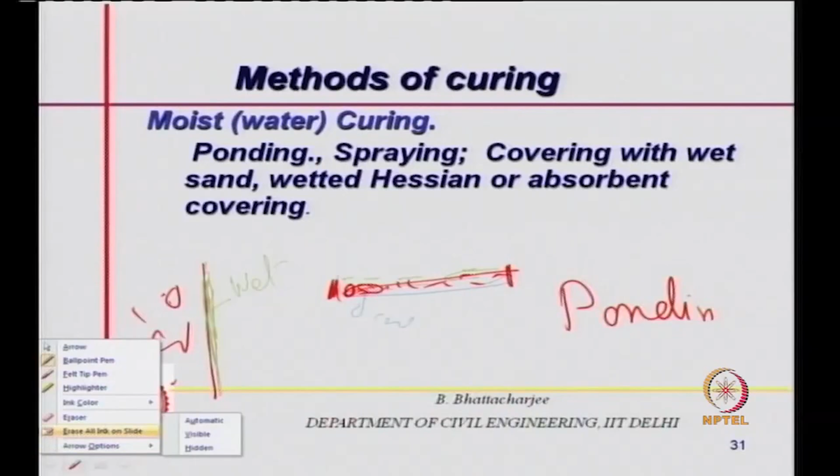Then you have got form retention and covering concrete prior to setting. Of course, you can retain the form, but that will not be replenishing the water, or cover the concrete prior to full setting or even after that. So water will not go away, but at the same time it will not replenish the water.

Membrane curing: basically you apply resins and waxes on top of the concrete to form a membrane. It can be sprayed or hand brush applied. So what it does is it will see that no water goes out. Whatever water is inside is used up, so no evaporation. Both this one and this one will ensure there is no loss of water, but they will not replenish the self-desiccation water. So these are the methods.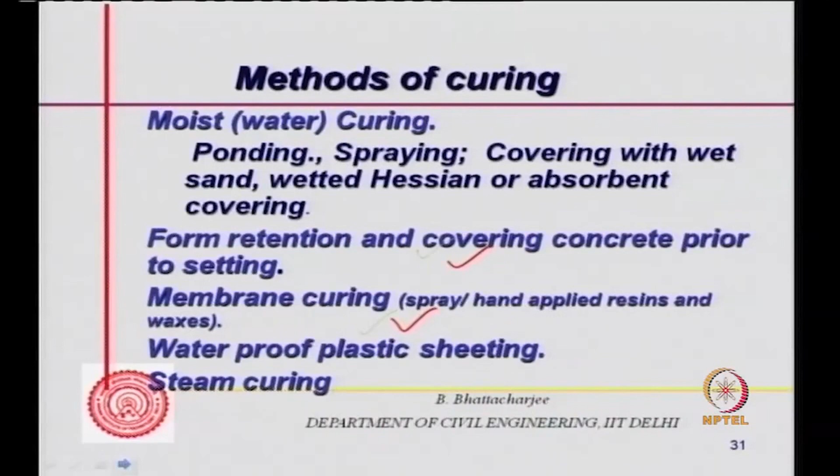Then you have steam curing. Waterproof plastic sheeting some people have used, and steam curing. Steam curing is used where you want to get accelerated strength. Maybe you are doing pre-stressing, so you want to do the pre-stressing quickly, and that's where you use this.

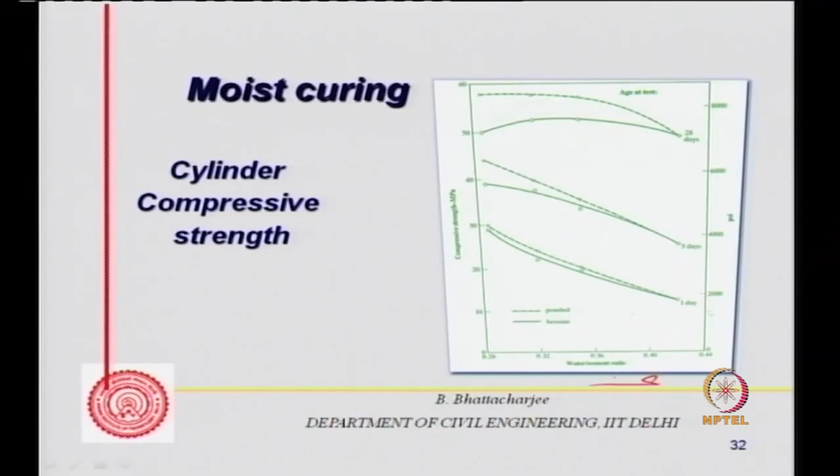Moist curing: if you see compressive strength, you can compare the compressive strength at 28 days, for different water cement ratios. So the comparison is ponded and Hessian. This high one is ponded, this is Hessian cloth, somewhere here Hessian cloth is here, ponded is there.

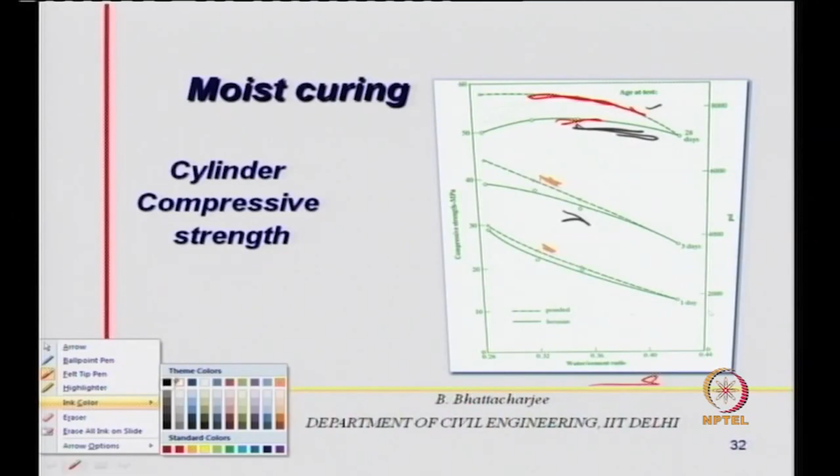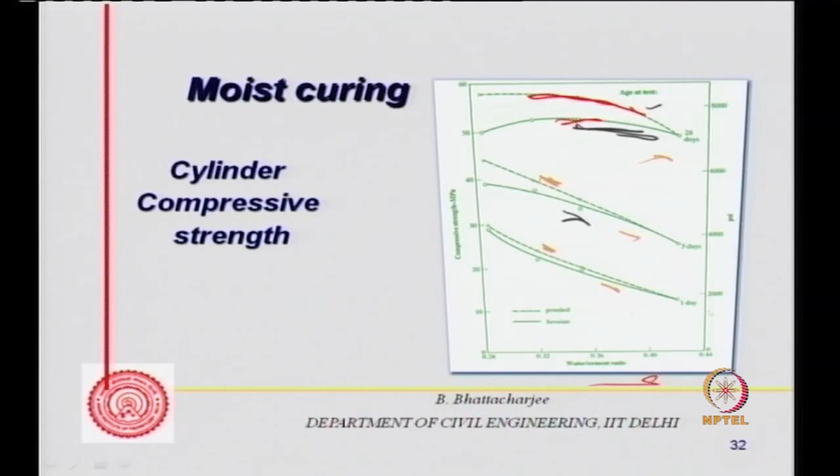So ponding does a good job, actually ponding does a better job, ponding is here, and Hessian is relatively lower. This is for 1 day, this is for 3 days, this is for 28 days. So ponding does a better job than Hessian, or putting a water absorbing cloth or covering.

So cylinder strength, basically what we want to see is the qualitative comparison, because quantitative values don't make much sense, it will vary from concrete to concrete. So Hessian, ponding is a good thing when you have the facility and also the possibility of doing it. For example, you can do ponding on slabs or horizontal members, particularly large horizontal members, but you can't do it on columns.

Curing by formwork covering membrane, of course, stops evaporation, as I said, but does not replenish the moisture loss due to self-desiccation. That's a problem.

Now, you need a minimum number of days of curing for segmentation of the capillary, and it depends upon the water cement ratio. For example, for water cement ratio 0.4, it is just 3 days, and for water cement ratio 0.7, it may take 1 year. So the higher the water cement ratio, more days are required to segment the capillaries. It's understandable, because with higher water cement ratio, larger will be the capillary pores and more of them, and they will be more connected.

They are beyond the percolation threshold, so all of them will be connected. So codes actually specify minimum curing days based on this. For example, the Indian code says that 7 days minimum curing is required for ordinary Portland cement, but if it is pozzolana blended, then you will need 10 days in normal weather, and correspondingly 10 and 14 days, and in dry weather like desert areas where it's more dry, you will require 14 days when you have pozzolana blended cement. Pozzolana blended cement will require more curing days for strength development, because that process is slow.

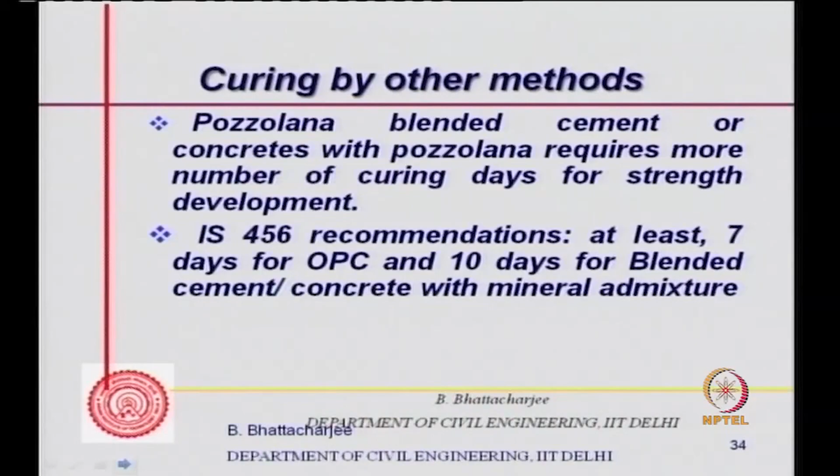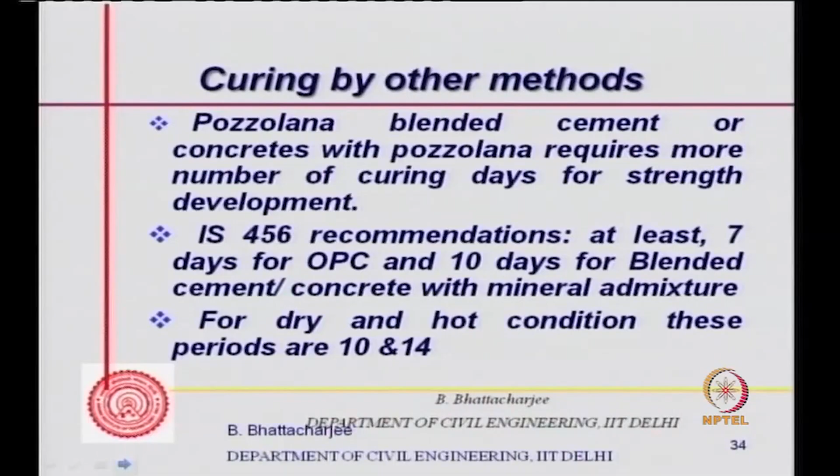As per IS 456 recommendation, curing should be at least 7 days for OPC, 10 days for blended cement and concrete with mineral admixtures in normal condition. For dry and hot conditions, these periods are 10 and 14 days respectively. Other codes are much more elaborate, discussing curing depending on water cement ratio, evaporation losses, and air velocity - the erstwhile British code was quite elaborate in this respect. Our code is much simpler.

What about temperature? Concrete is cast and cured at an indicated temperature. Let's say at 30 degrees centigrade, at 1 day age, and this is 28 days. If you cure at 10 degrees centigrade, strength is here; 20 degrees, strength is here; 30 degrees, strength reduced; 40 degrees, strength reduced. So if you look at 28 days strength, curing at 40 degrees will give less strength than curing at somewhere around 20, 22, 23 degrees. Similarly for 3 days strength and so on.

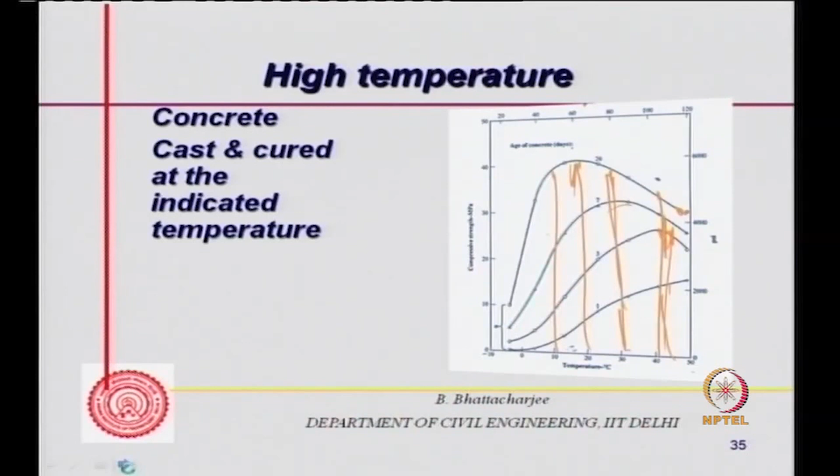So at higher temperature, early strength gain is high, but the later 28 days strength actually reduces. So maximum 28 days strength you get at 20 degrees centigrade when casting and curing at the same temperature. Now we talk in terms of something called maturity, the temperature effect.

What has been seen is that temperature is measured, above -11 degrees centigrade, and for T1 maintained at delta T1 for delta T1 time, T2 for delta T2 time, etc., and you sum this up - this is what is called maturity. It has been seen that maturity on a log scale, degree centigrade days, versus compressive strength, can be linearly related. So higher temperature for lesser time gives almost the same effect as lower temperature for a longer period.

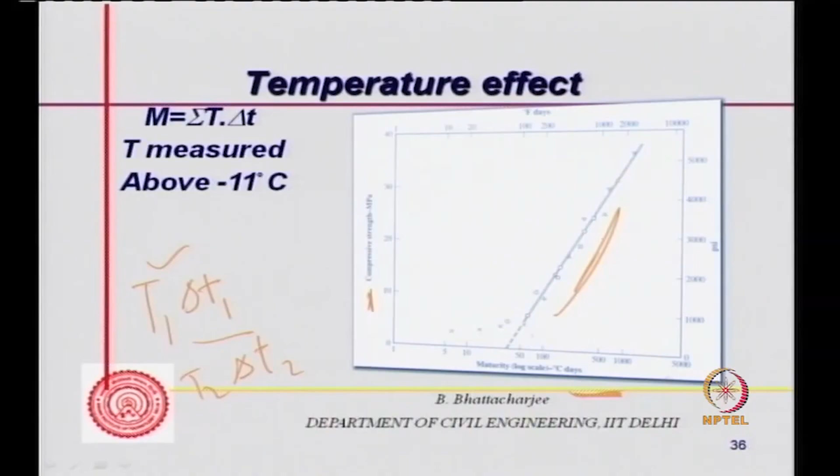That's the idea, and that gives you the idea about steam curing. So we'll just look at steam curing.

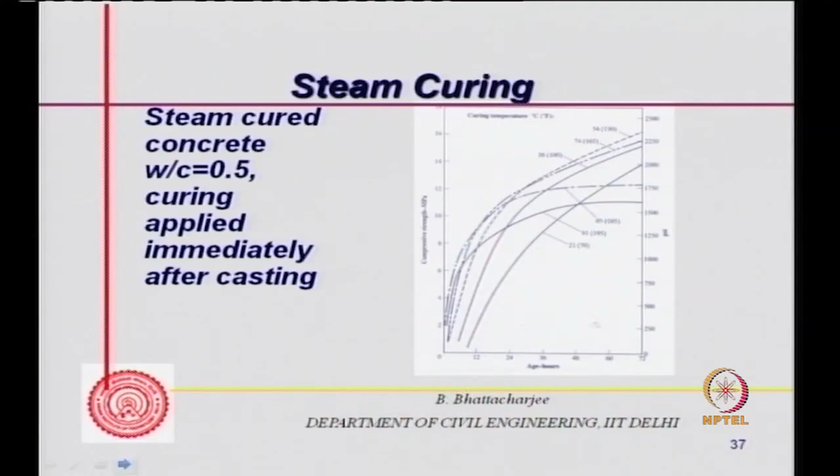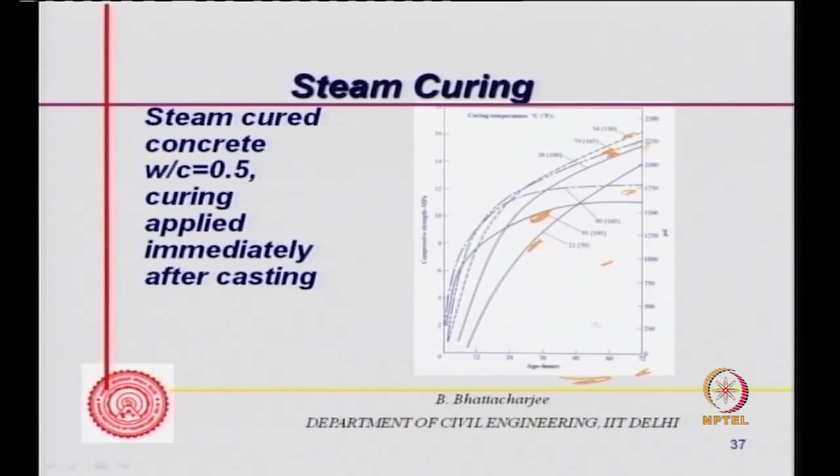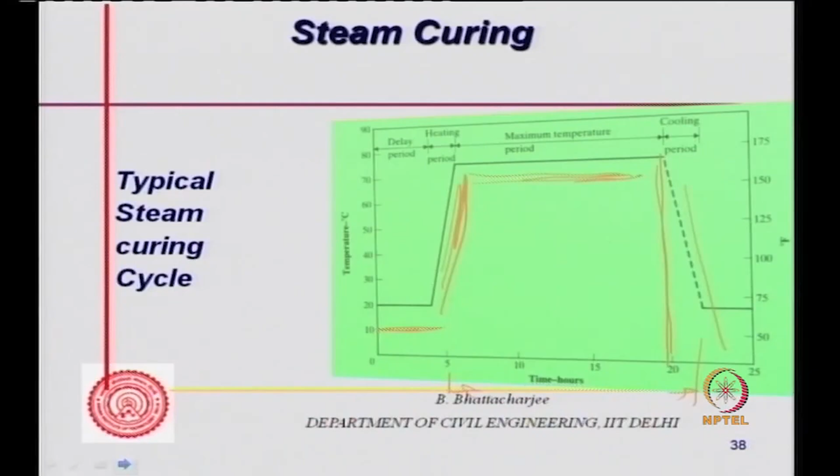Generally, steam curing at atmospheric pressure will be at about 75-80 degrees centigrade. You don't apply it immediately, because then you don't get strength gain, so there is a delay period, then a steam heating period where you maintain that temperature and supply steam, then cool it. So basically something like 5 to 20 hours - if you do about 15 to 20 hours, or 13, 14 hours of steam curing, this is the kind of practice we do to get good strength. That's a typical steam curing cycle, used when trying to get early strength.

So we can summarize now. We have looked into all the methods of compaction and the mechanism of how compaction occurs, and lastly we looked into curing - the methods of curing, need for curing, and importance of curing. One thing: curing is very important from a durability purpose, which people quite often ignore. It's good for strength development, but minimum curing is absolutely essential for durability.

We often ignore curing because of common practices. If it is sprinkled continuously in a precast factory, that will be good curing, but in situ curing is quite often ignored - the most unskilled person would be doing it. Such curing does not help the system; strength will be lower, and durability might also be affected. Another contractual problem is that in the Indian scenario, curing is always part of concreting, not a separate item, so therefore strength development is also affected.

So that's all as the summary, and summary of module 5, where we have largely looked into fresh concrete issues and the concrete production process. Curing completes it. Thank you very much.